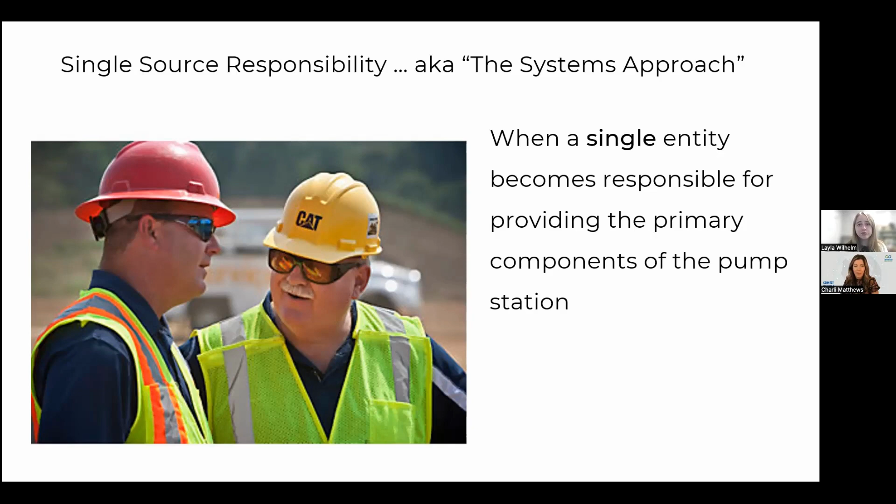Single source responsibility directives. These are the main responsibilities of that single person, that single entity: coordination of key pump station components, ensuring component compatibility, system startup and commissioning, and also future support for repair, maintenance, upgrades. It really brings peace of mind to the customer that someone's ensured that everything will operate together, especially on those larger jobs, where there's a very large station or many stations with a lot of components that need to cooperate and work together when they get on site.

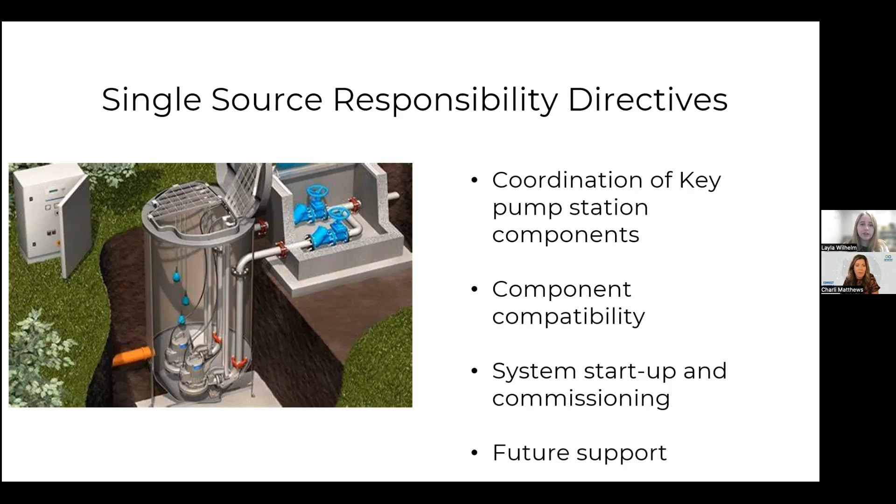And a way to do this is through a design build contractor. Someone who follows the project delivery from start to finish, from initial design to installation even. This person is really the source of contact for all of the parties. And there are some advantages to that: reduced completion time. It actually can reduce the overall timeline of the project. It can also reduce the overall cost, since there's not that time going back and forth to make sure that everything's working together. You have someone checking that. And then also just improved coordination.

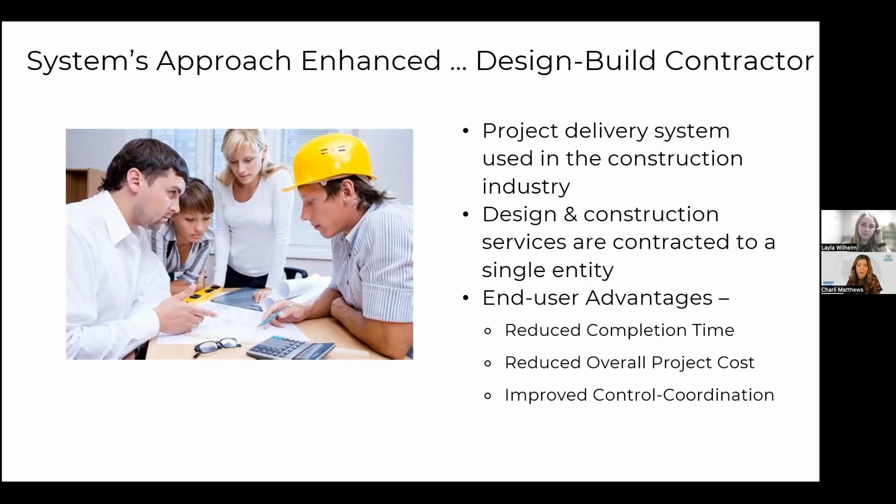So some of the benefits, we talked about a little bit, the cost reduction. There's also a level of component quality, because you're getting the best stuff when you have someone who's double checking that compatibility. They can also coordinate delivery, making installation easier because all of your products are on site when you need them. So you're not waiting for one component here or there. And in the same vein, it can reduce the overall timeline of the project.

This person is also great as supplier support. They can have the conversations with suppliers about delivery and getting things on site, making sure of that compatibility. It also helps that it's one contact, one relationship, where there's no question of who to talk to. If I'm a manufacturer working with this person and I have a question of, well, do I need to paint it pink or purple? I can ask that person. And so it benefits all of the parties in the project, not just the customer.

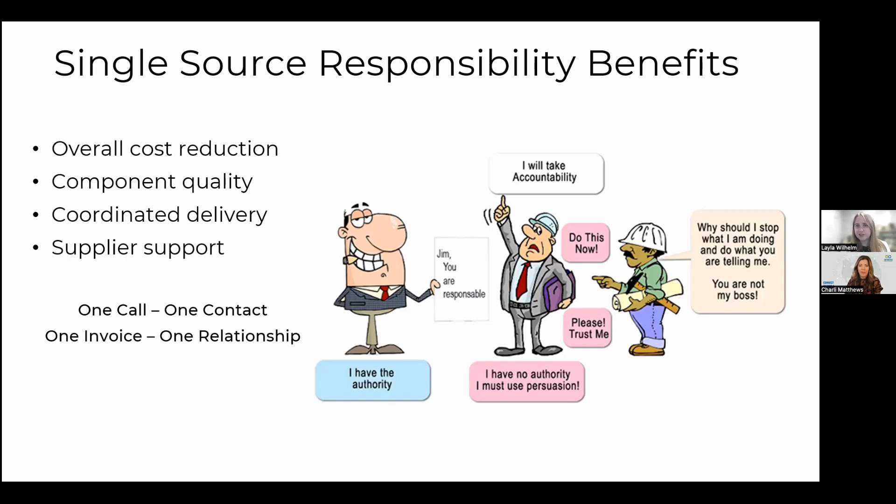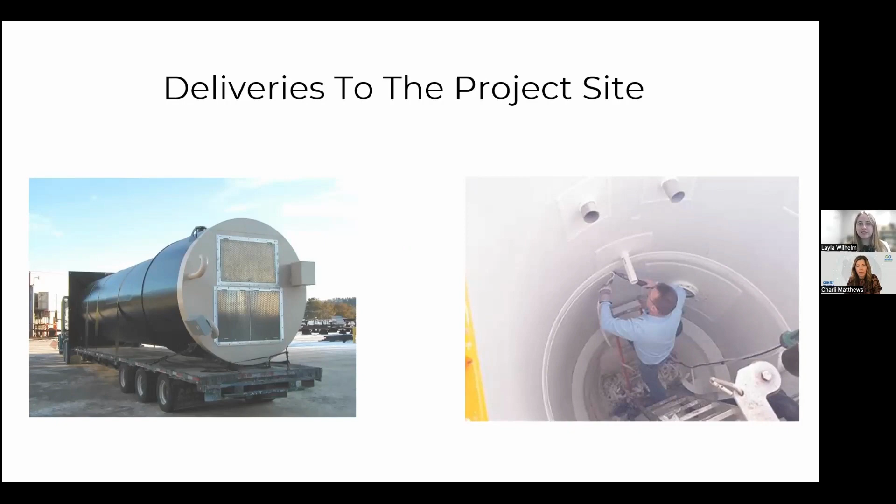And so what does that delivery look like that they're coordinating? Sometimes it is on a prefabricated basis. Sometimes it's all of the parts getting there at the same time and being put together at the same time. These are just some examples of what you might see in that submersible wastewater world. And so next, we want to go into the components that make up that system.

So these are just some examples of different types of basins and stations that are out there. These can be prefabricated, they can be modular, they might be all assembled on site. They are usually duplex, especially in the municipal world, but there are possibilities for larger, triplex, even quadruplex.

This is mostly for redundancy purposes. These stations are often critical. If a pump goes down for whatever reason, you have a backup. But it also lends to energy efficiency.

A good example is a station where you may have a single 50 horsepower pump. You can replace that station with two 25 horsepower pumps. And while the cost of the two stations may be similar overall, those 25 horsepower pumps are going to use less energy when operating than that 50 horsepower pump would, especially when they're alternating. And so that can be an energy cost savings for a customer.

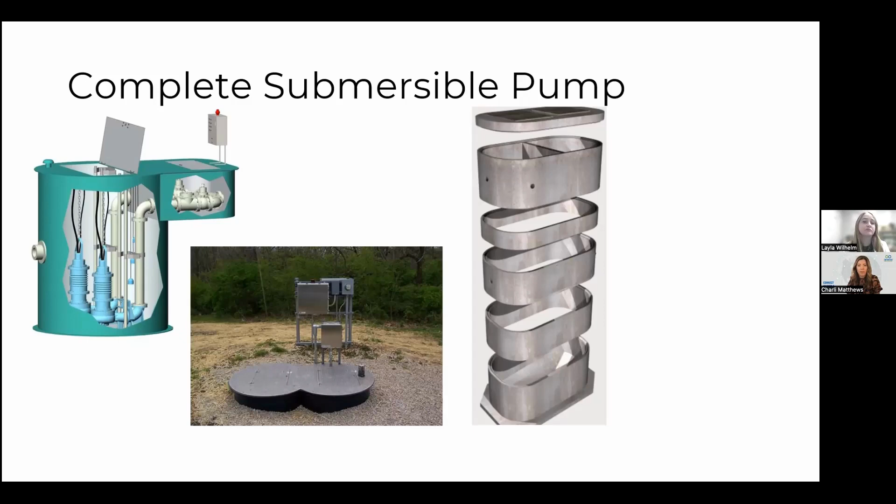So to talk about the individual components, the biggest part is the basin itself. Basins come in fiberglass and concrete. Those are the most common materials. There are some other materials out there, polyethylene, and there might be others that aren't coming to mind right now. And they come in all different shapes and sizes. You have rectangular or square. Typically, your fiberglass ones are round. And like I said, sometimes they're prefabricated and shipped to the site. Sometimes they're fabricated in place, especially with concrete.

Note on this picture right here, second from the left, we've got those blue basins. They have an integrated valve vault. So does the picture on the far right. That has an integrated valve vault. What that does, and I'm going to talk about it a little bit more later, is it makes excavation easier. It makes piping easier.

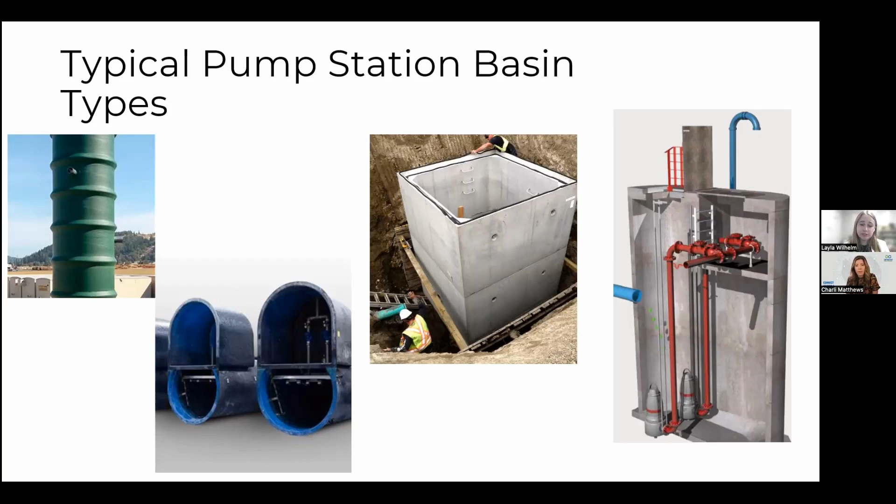And often something to think about with excavation is, is it hard to excavate there? Is it a rocky terrain? Is it a particularly hard soil? Is it someplace where the frost line is very low? So you need to take into account that depth. So things you can do to make excavation easier as someone designing or manufacturing a product are going to make your customer's life easier.

So the next part is the basin cover. This is the lid for the basin. Basins have overall minimal above ground footprint, as you can see in some of these pictures. Most of what's going on is underground, but that cover is really one of the only components. There are many different types of access covers out there. They come in different materials, different sizes, different shapes. Sometimes they are complete all metal, maybe steel or aluminum. Sometimes they are cast into concrete.

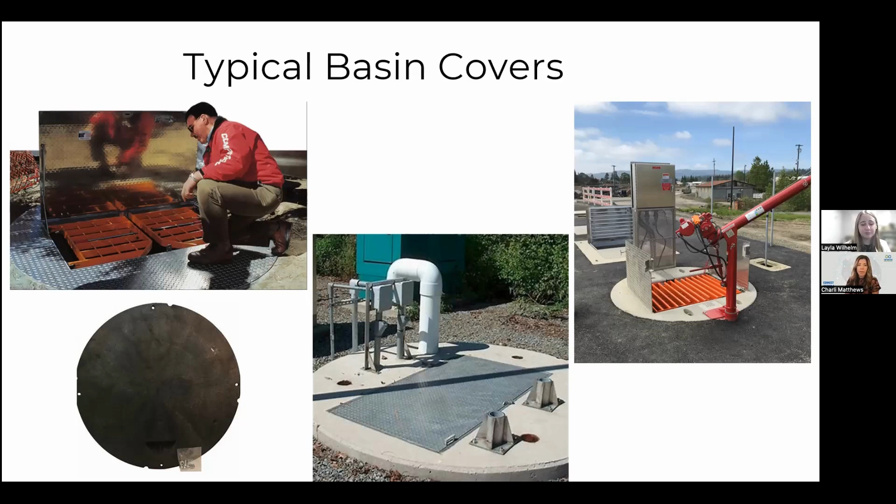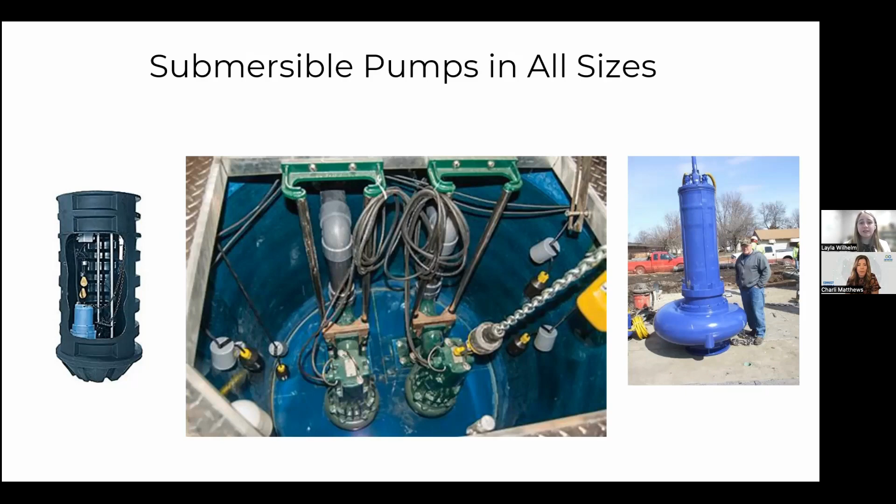Guide rail systems. So this is something that makes submersible pumps easier to use. How these guide rail systems work is there is an elbow that is attached to the floor of your basin, whether it's concreted in, epoxied, or bolted. Different manufacturers have their different recommendations. And there are rails that go from that elbow to the top of the wet well, and there are usually some brackets for stability. And this allows the pump to slide up and down. There's an attachment on the pump, and it'll lock into place on that elbow, and it completes the discharge piping.

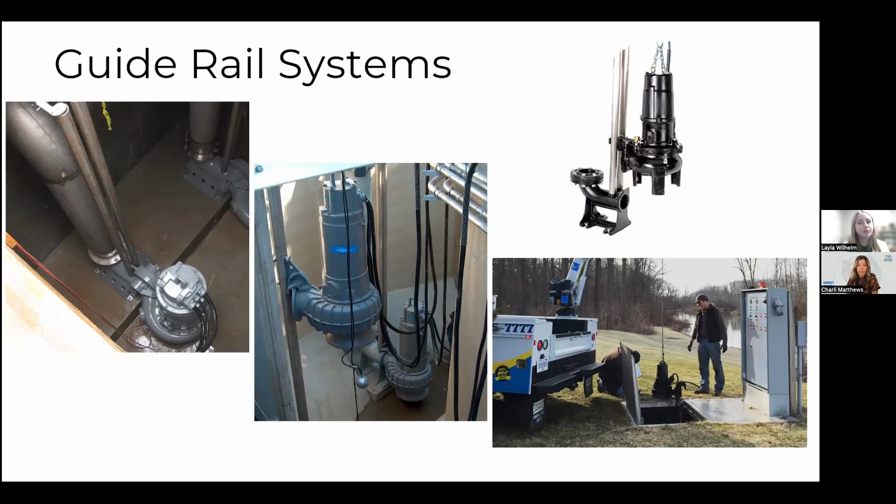This makes for easy access to the pumps when you're repairing them or maintaining them, and it makes for easy installation as well. Often, with some of the pump sizes, they're fairly heavy too. You need to utilize a hoist or a crane truck, like you can see in the one picture. And so that guide rail makes it a little bit easier to make sure you're putting it in the exact right spot in the wet well as well.

Valves. So pump stations need valves for various reasons, the major ones being isolation and backflow protection. Valves can be located in a couple different spots. They can be in the wet well itself, or they can be in a valve vault, like we looked at a little bit before.

There are a lot of local codes about where valves can be located and what kind of valves can be used. And there's also hazardous area classifications that need to be taken into account. So when selecting and designing where your valves are going to go or what kind of valves you're going to use, be sure to pay attention to those codes and that classification.

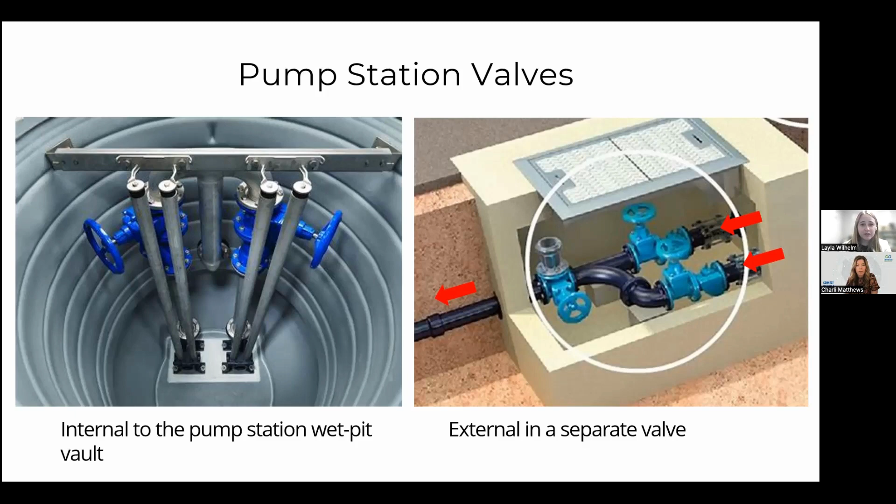whereas in your duplex and your triplex, the need for the isolation valve is more critical, because if that pump goes out of service for some reason, you're repairing it, replacing it, you need to be able to isolate that discharge piping so that when the other pumps are running, they're not just pumping back through that piping. Check valve for a similar reason.

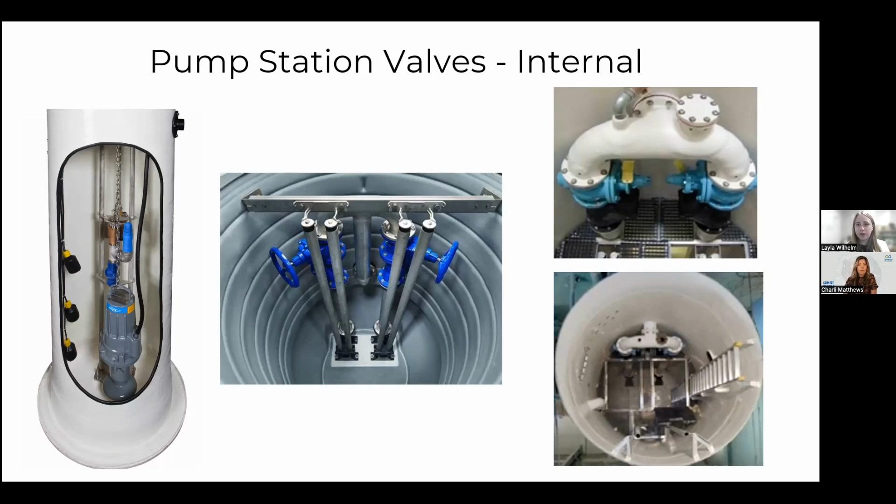There's also external valves, like the valve box we talked about. It's almost like another basin. It might be concrete, it might be fiberglass. Sometimes it's directly attached to the basin. Sometimes there's piping going in between the basin and the valve vault. And this is just a place for the valves to sit, typically underground.

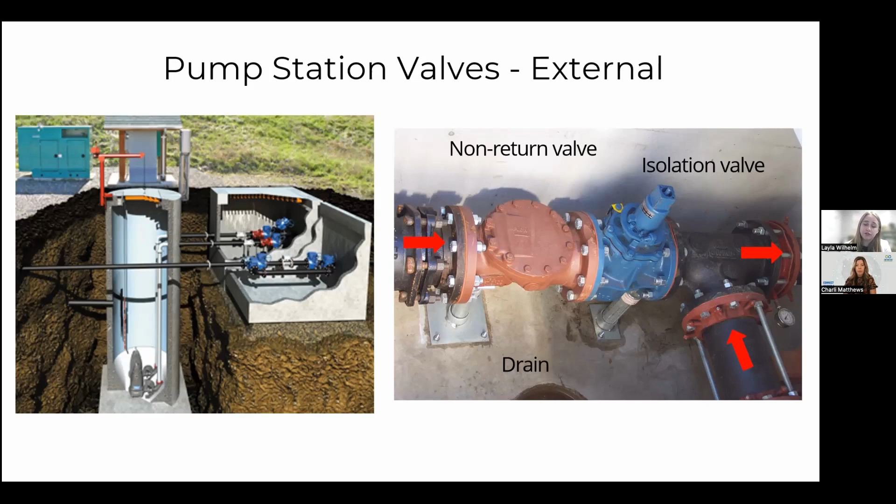And as you can see, we call it a non-return valve here. Another word is a check valve, and you've got your isolation valve. It also has a drain in case for any reason these valves are leaking. That drain will actually often go back into the basin, so it doesn't just sit there. And sometimes too, you'll see a small sump pump in these valve vaults that will go back to the station as well.

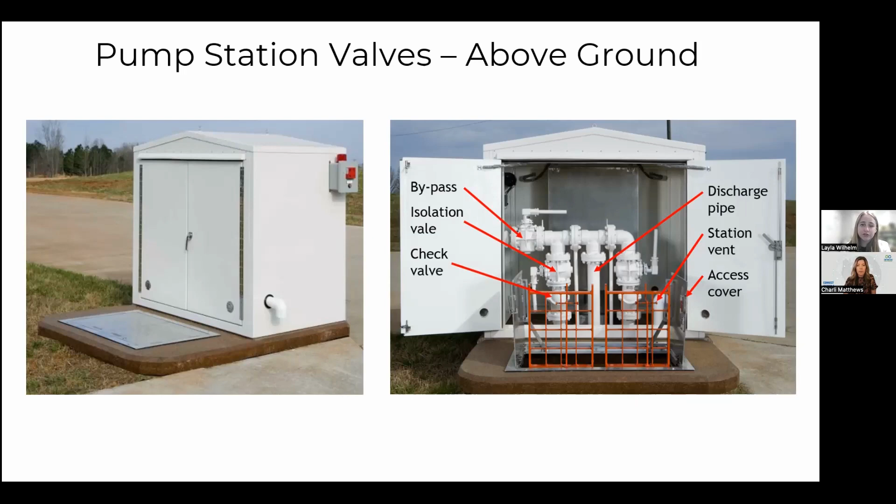But this can be more expensive. It's another piece of equipment. It's usually another concrete pad to pour. So it's got its positives and negatives. This is also really good for, again, places where excavation is hard, rocky terrain, hard soil, environmental concerns. This would be great for that type of application.

And next is control panels. Panels can be anything from super simple to very complex. They really are subject to what the customer wants. It could be as simple as an on-off switch, or it could have a huge sophisticated telemetry system monitoring everything the pump has to offer.

These enclosures are NEMA rated, and that is selected based off of the location they're in, the environment, the kind of weather they're going to see. There are also hazardous classifications taken into account there, so explosion-proof ratings. These panels also have to weather the elements. So sometimes they have air conditioning if it's in a hot environment, or heat in a cold environment, and sometimes even lightning protection in a place that gets really heavy thunderstorms.

Because of the varying complexity, panels can be very low cost or very expensive. And this is really dependent on what the customer wants the panel to do. They are typically close to the station, like you see here. But sometimes if for some reason that station's in a place that's not safe for the panel or not ideal for the panel, they can be placed at a distance.

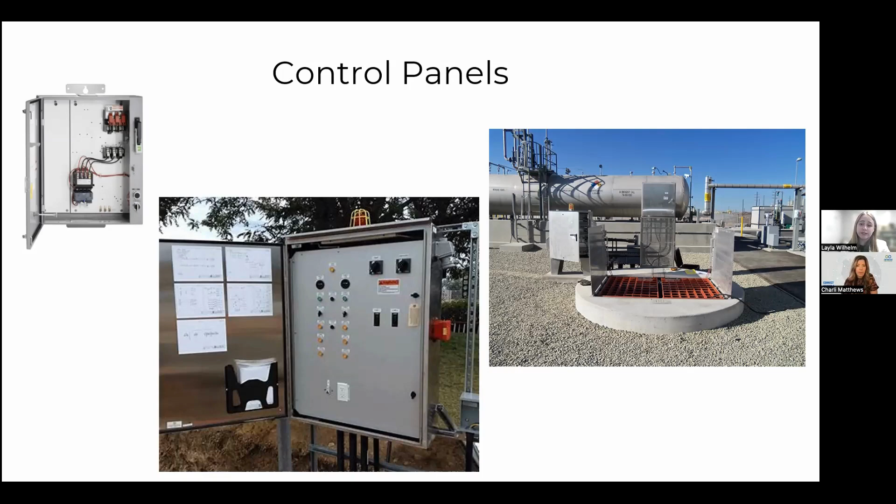A challenge that faces all level controls is FOG: fats, oils, and grease. That sticky FOG likes to stick onto the ball floats, onto that segmented pole type, and it can make these measurements inaccurate when they're sensing the level. The ball floats will become larger and then will turn off and on at the wrong time. So that's something that you have to take into account when designing stations. Some of them do better with FOG, some do worse. Each of these technologies does have its positives and drawbacks, so it is really about finding the best one for your particular application.

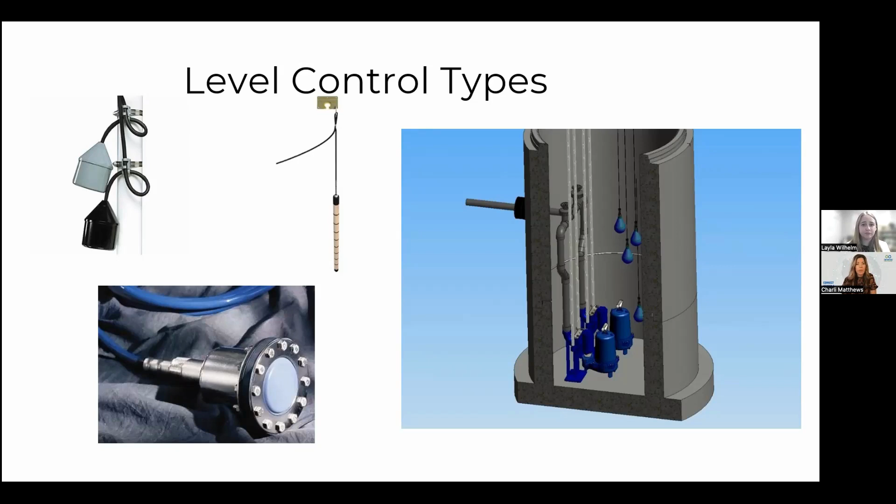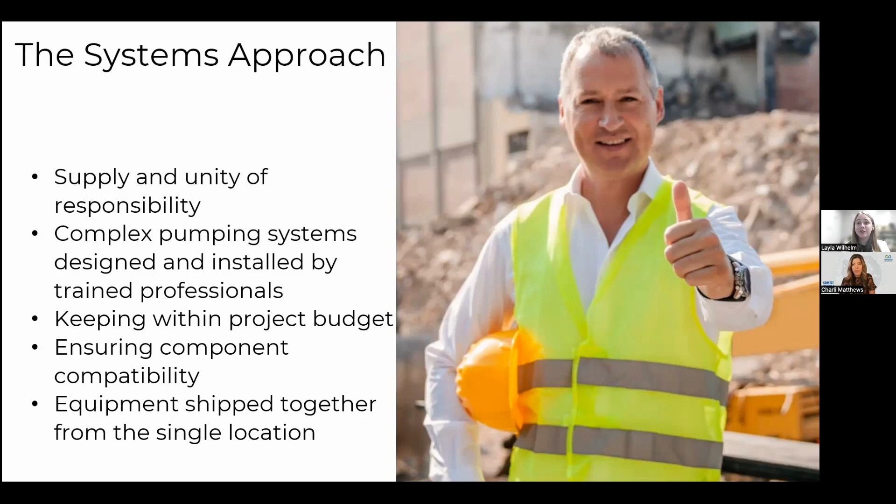So to wrap up on the systems approach, it is the supply and unity of responsibility, having those complex pumping systems designed and installed by a trained professional, keeping within the project budget, so again, reducing that cost, ensuring component compatibility, and ensuring that that equipment ships together from the single location to the job site. So pretty much anywhere from a basic station to a complex station, we can focus on the compatibility of the components and keeping everything tight and delivering a quality product to the customer.